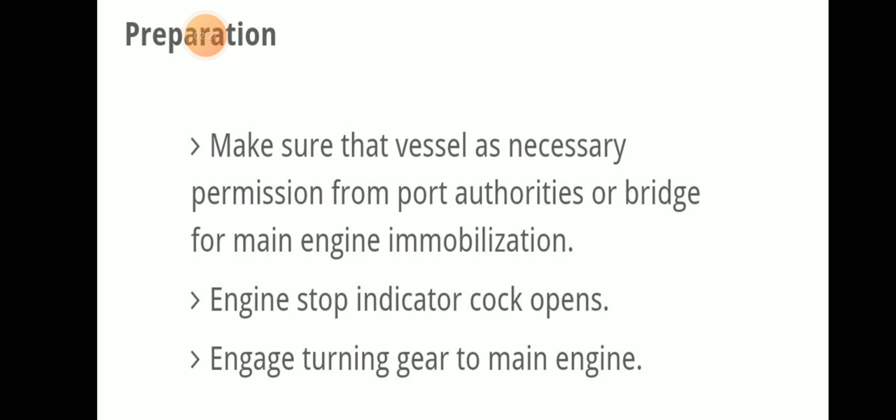So the preparation step means we have to get permission from the concerned authority, the port authority, that is the main engine immobilization certificate. Then we stop the engine, open the indicator cocks, and engage the turning gear to the main engine. For the inspection, first we inspect the scavenge space.

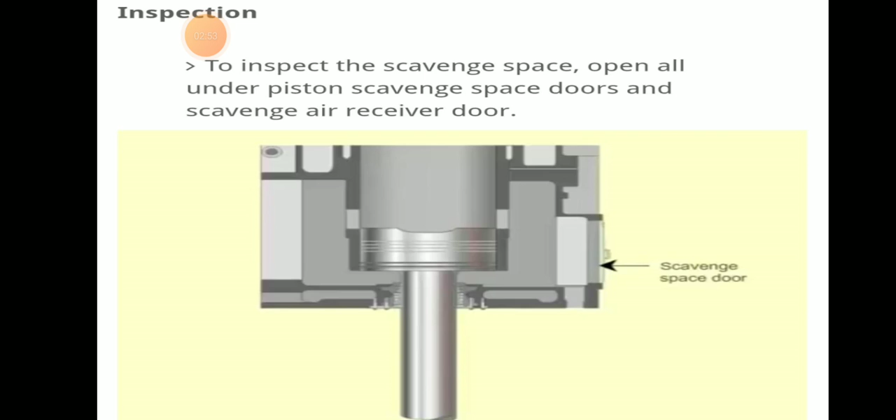We open all under piston area scavenge space doors and scavenge receiver doors. Here in the picture we can see the scavenge space door. Then we ventilate the space using a portable blower.

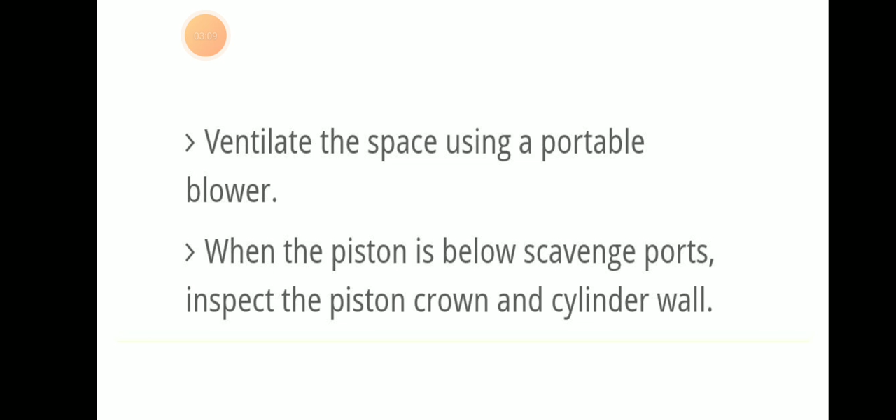When the piston is below the scavenge port, we inspect the piston crown and cylinder wall. Then we check for any frictional wear between the sliding surfaces of the cylinder liner and piston, whether there is any friction resistance between them.

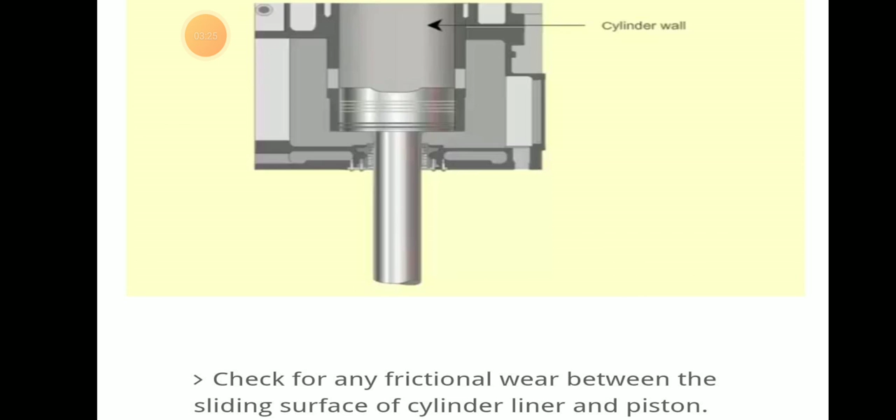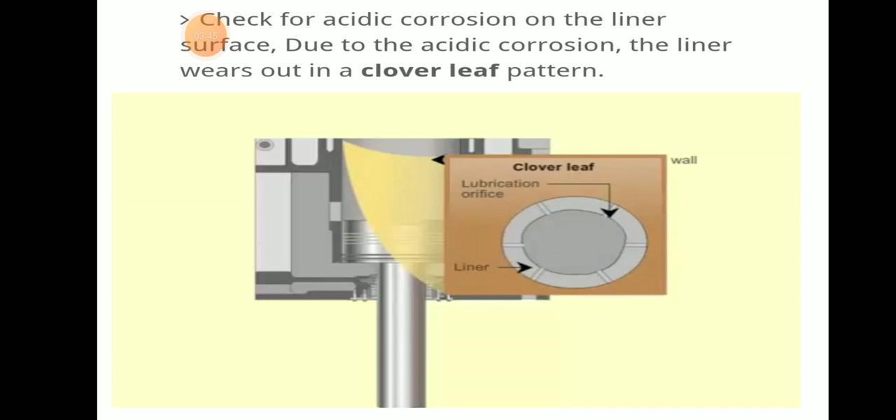Then we check for acidic corrosion on the liner surface. Due to acidic corrosion, the liner wears out and a clover leaf pattern may be formed. So we check for acidic corrosion to ensure there is no clover leaf formation.

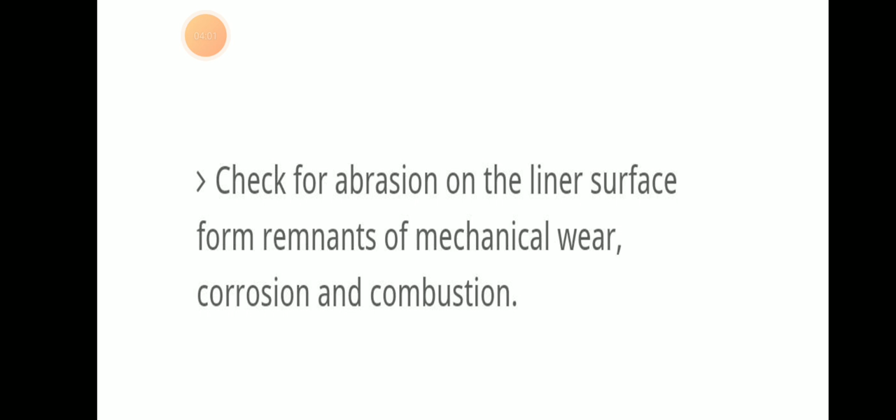Then we check for abrasion on the liner surface, which forms from remnants of mechanical wear, corrosion and combustion. We can see abrasion on the cylinder liner.

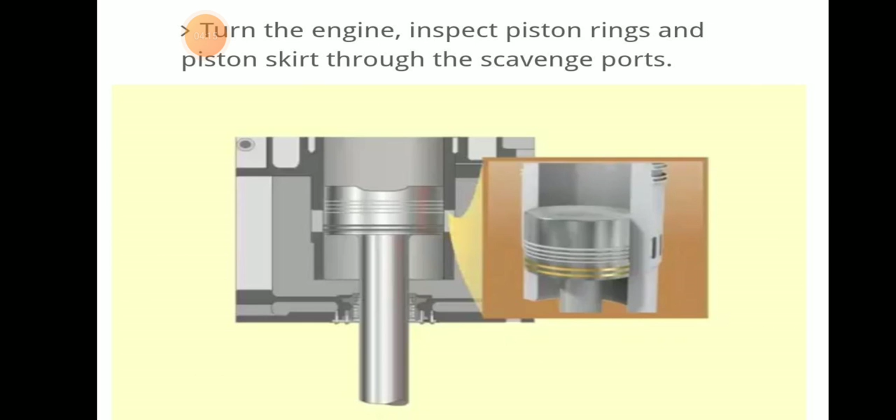Then turn the engine slightly and inspect the piston rings and piston skirt through the scavenge port. If the condition is good, then no problem. We can also turn the engine to inspect the piston rod and check whether its condition is good.

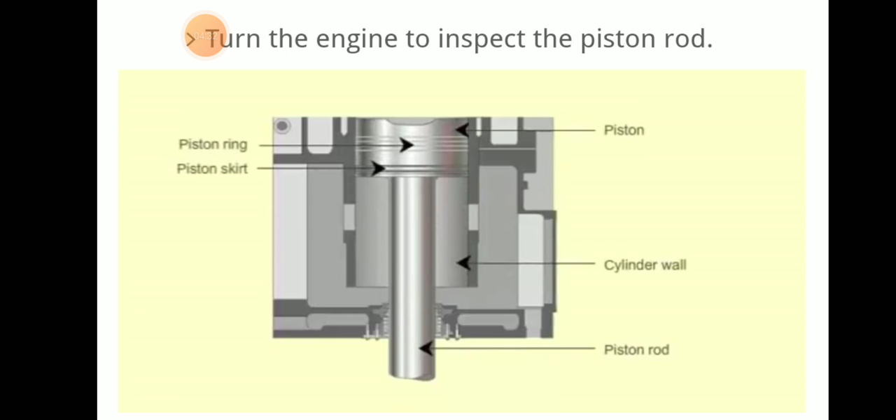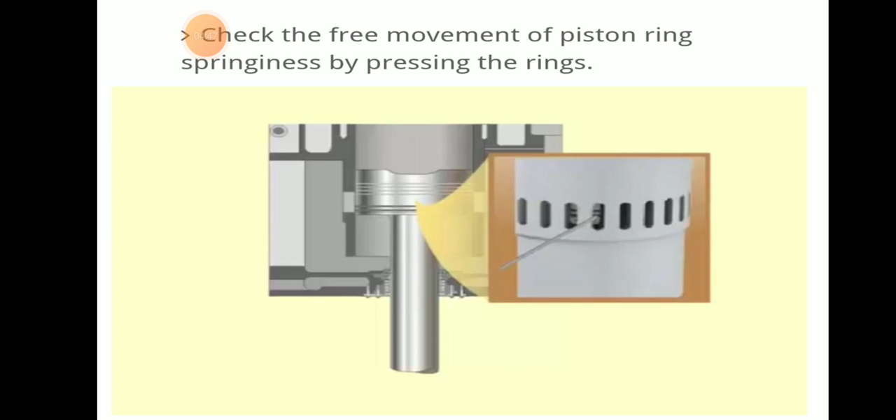Then we check the free movement of the piston rings and their springiness by pressing the ring inside. By pressing the ring, we can understand whether there is free movement or not.

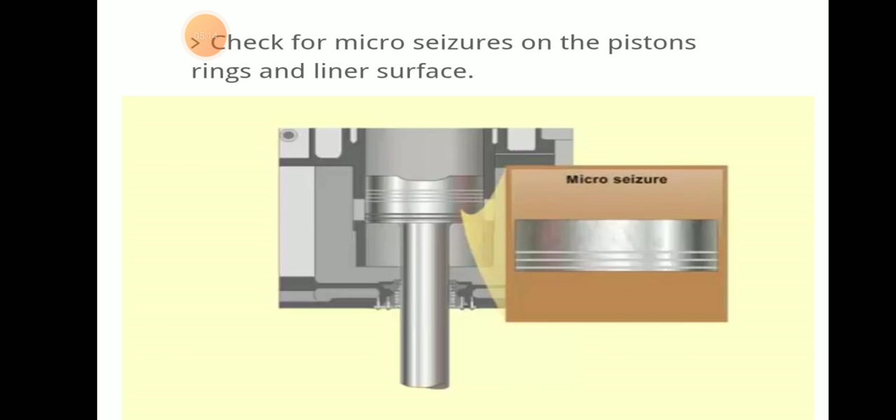Then we check for micro seizure on the piston rings and liner surface. Here in the picture we can see small micro seizures. When there is no proper cylinder lubrication and the engine runs, micro seizures form on the piston rings and liner surface. So we need to check for them.

These are the things we need to follow during scavenge space inspection.